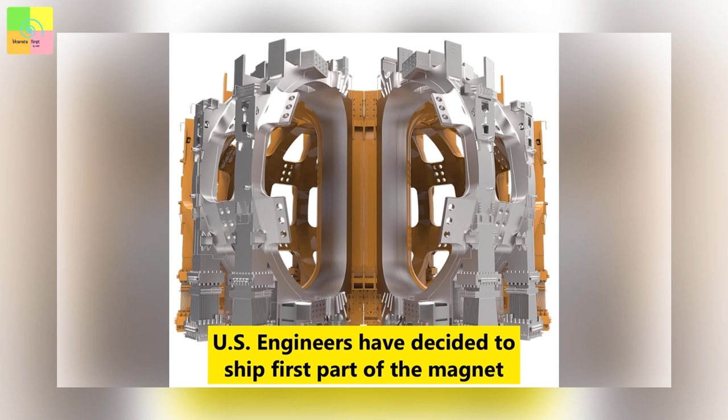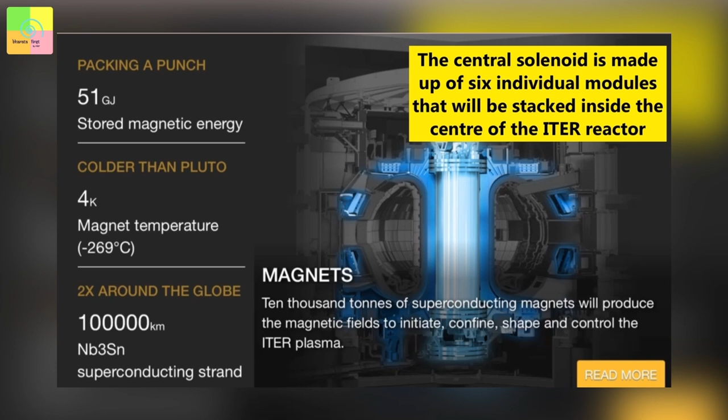US engineers have decided to ship the first part of the magnet known as the central solenoid. The central solenoid is made up of 6 individual modules that will be stacked inside the center of the ITER reactor. The magnet will be 18 meters tall, 4.2 meters wide, and weigh around 1000 tons once fully constructed.

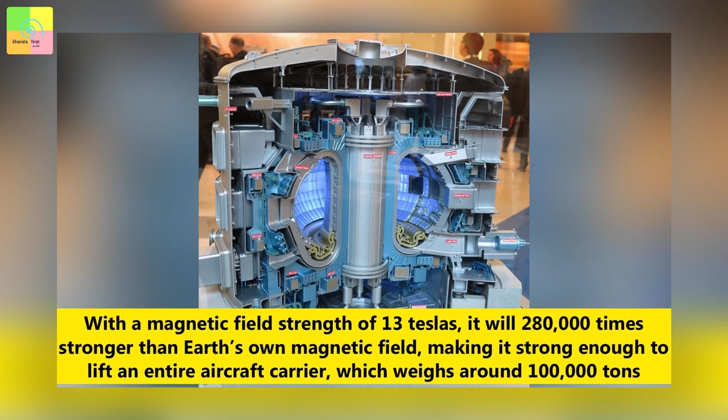With a magnetic field strength of 13 Teslas, it will be around 280,000 times stronger than Earth's own magnetic field, making it strong enough to lift an entire aircraft carrier, which weighs around 1 lakh tons. This magnet will make up the heart of the world's largest fusion reactor.

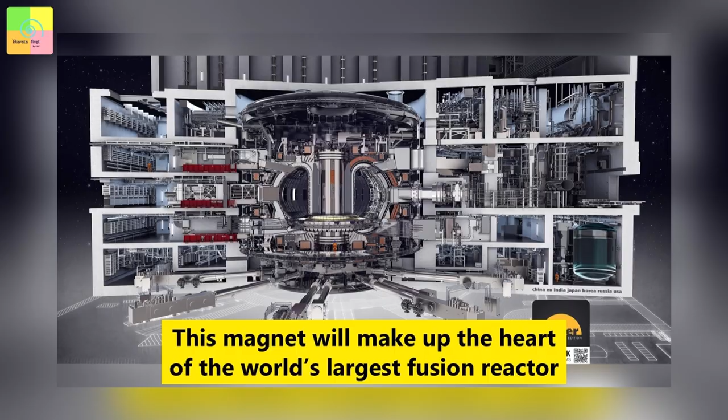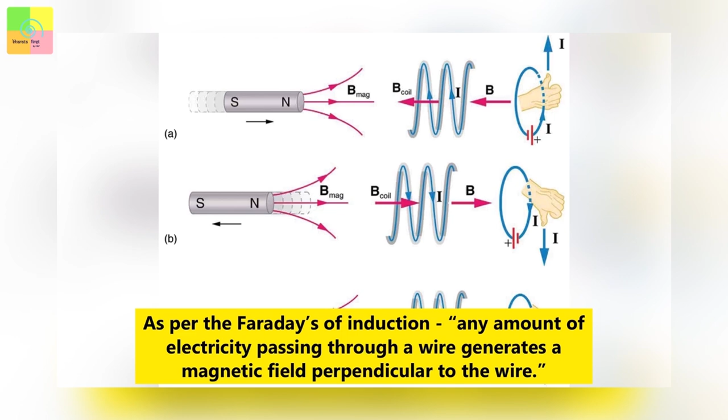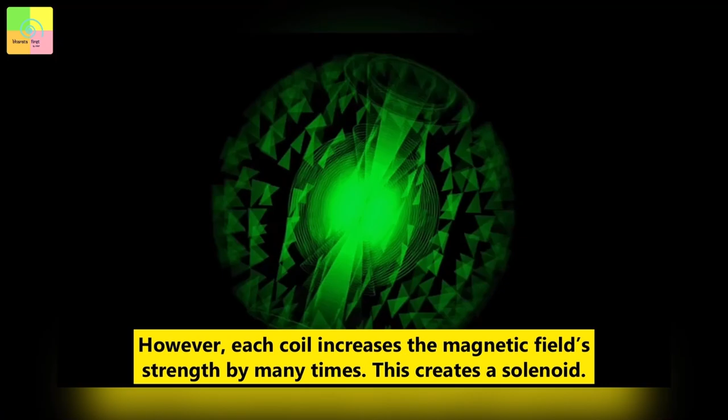It is based on the principle of Faraday's law of induction, which states that any amount of electricity passing through a wire generates a magnetic field perpendicular to the wire. After this, the wire is coiled into a circle, so the electric current produces a circular magnetic field. However, each coil increases the magnetic field strength by many times. This creates a solenoid.

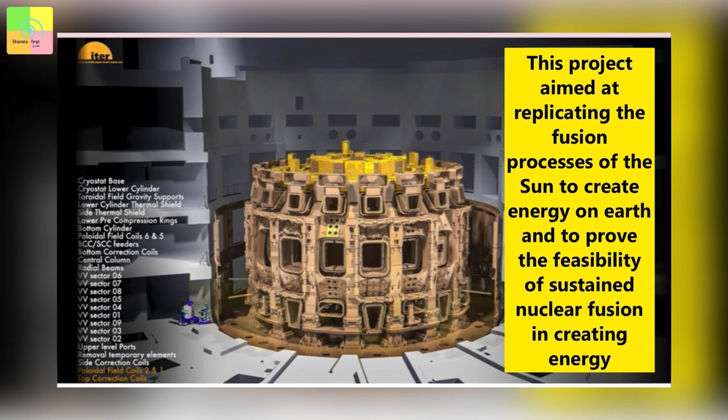What is ITER? The project was originally named International Thermonuclear Experimental Reactor, but it has been named ITER, a Latin word meaning the way or the path. ITER is one of the most ambitious projects in the world. This project aims at replicating the fusion processes of the sun to create energy on Earth and to prove the feasibility of sustained nuclear fusion in creating energy.

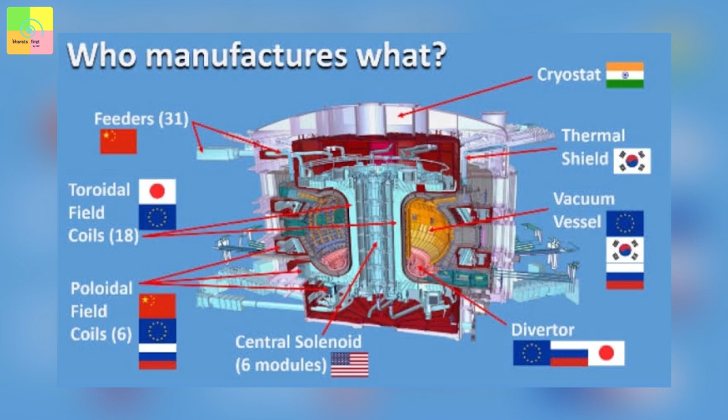The ITER project is currently under construction on a 180-hectare site in southern France. The ITER members are China, the European Union, India, Japan, Korea, Russia, and the United States, now engaged in a 35-year collaboration to build and operate the ITER experimental device and together bring fusion to the point where a demonstration fusion reactor can be designed.

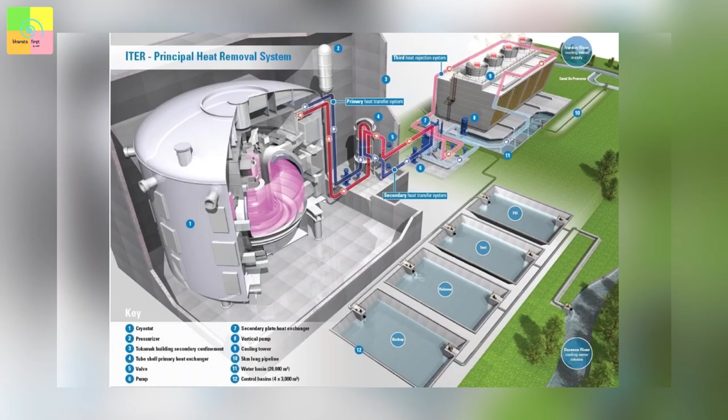What is a tokamak? Power plants today rely either on fossil fuels, nuclear fission, or renewable sources like wind or water. Whatever the energy source is, the plants generate electricity by converting mechanical power, such as the rotation of a turbine, into electrical power. In a coal-fired steam station, the combustion of coal turns water into steam, and the steam in turn drives turbines and generators to produce electricity.

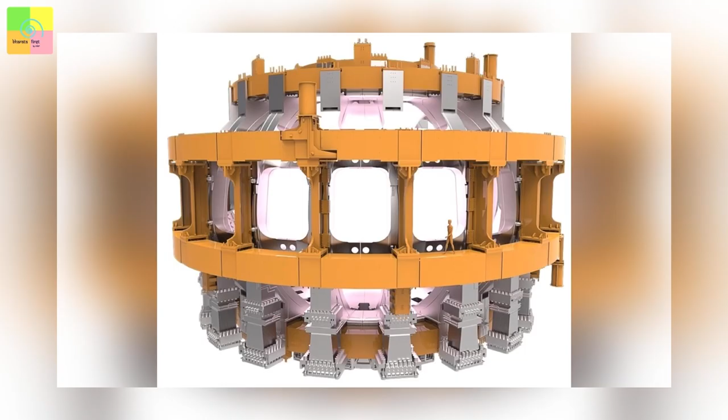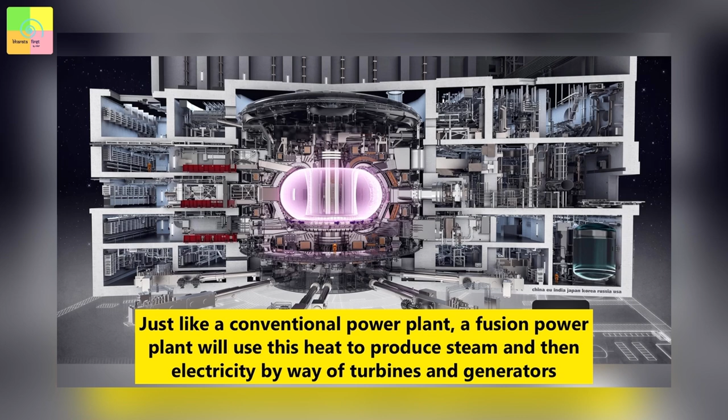The tokamak is an experimental machine designed to harness the energy of fusion. Inside a tokamak, the energy produced through fusion of atoms is absorbed as heat in the walls of the vessel. Just like a conventional power plant, a fusion power plant will use this heat to produce steam and then electricity by way of turbines and generators.

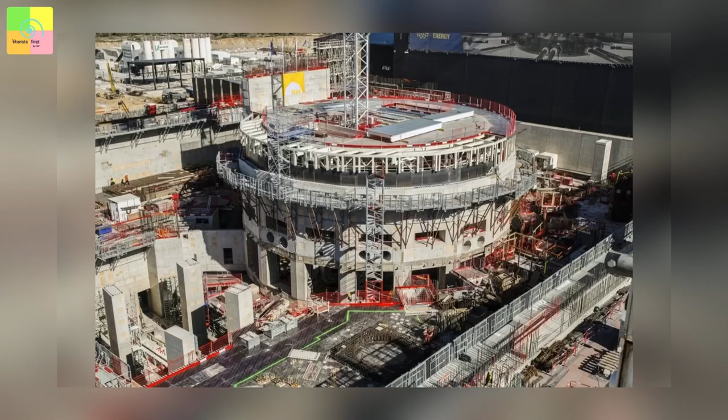What will ITER do? The amount of fusion energy a tokamak is capable of producing is a direct result of the number of fusion reactions taking place in its core. Scientists know that the larger the vessel, the larger the volume of plasma, and therefore the greater the potential for fusion energy.

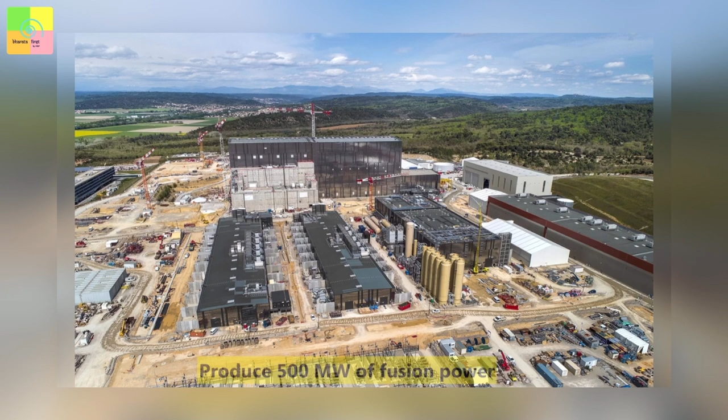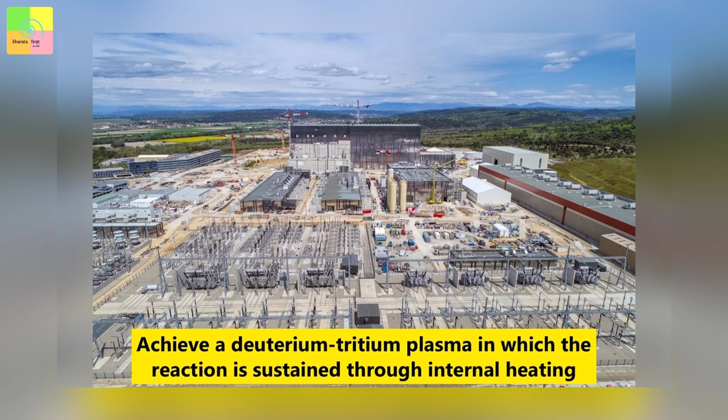The machine has been designed specifically to cater to these functions: produce 500 megawatts of fusion power, demonstrate the integrated operation of technologies for a fusion power plant, achieve a deuterium-tritium plasma in which the reaction is sustained through internal heating, test tritium breeding, and demonstrate the safety characteristics of a fusion device.

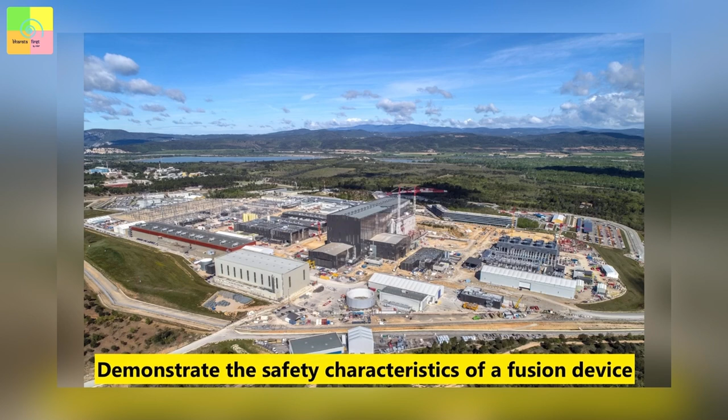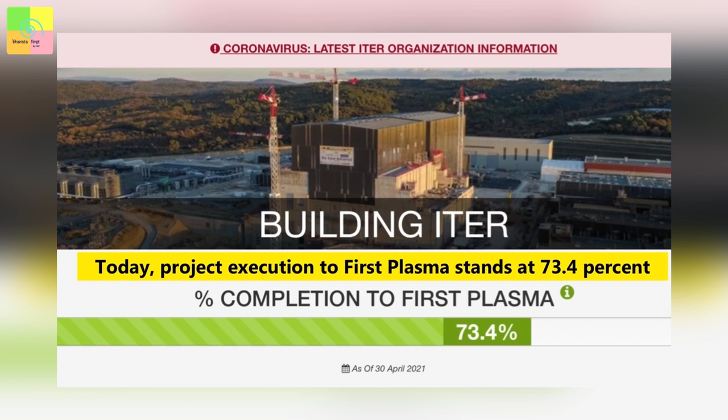ITER, or ITER's first plasma, is scheduled for December 2025. Today, project execution to first plasma stands at 73.4%.

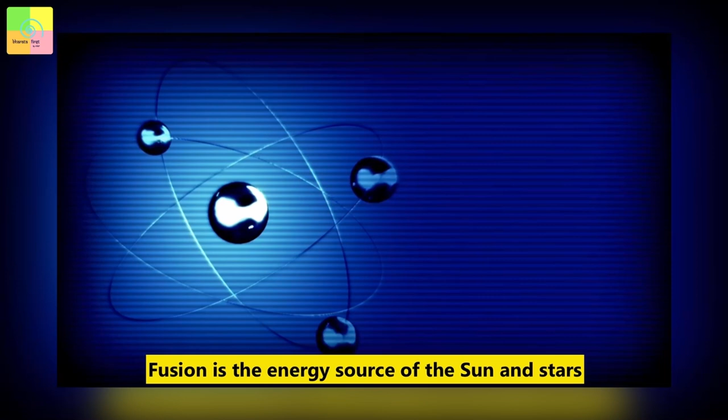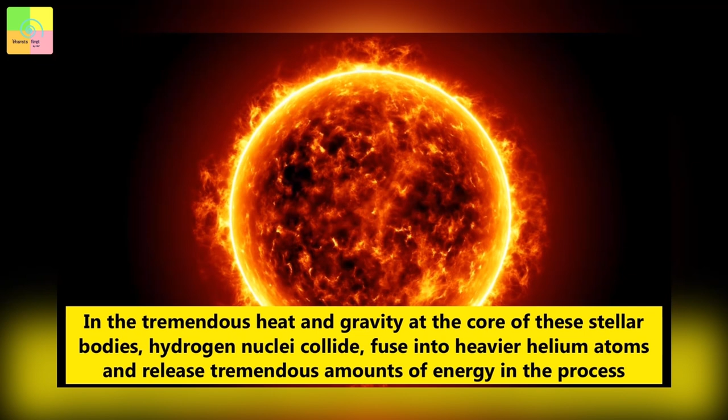Now the question is, what is fusion? Fusion is the energy source of the sun and stars. In the tremendous heat and gravity at the core of these stellar bodies, hydrogen nuclei collide, fuse into heavier helium atoms, and release tremendous amounts of energy in the process.

Three conditions must be fulfilled to achieve fusion in a laboratory. First, it should have a very high temperature. Second, it should have sufficient plasma particle density. Last but not the least, it should have sufficient confinement time. Thus, mankind will soon be into the era of new energy.